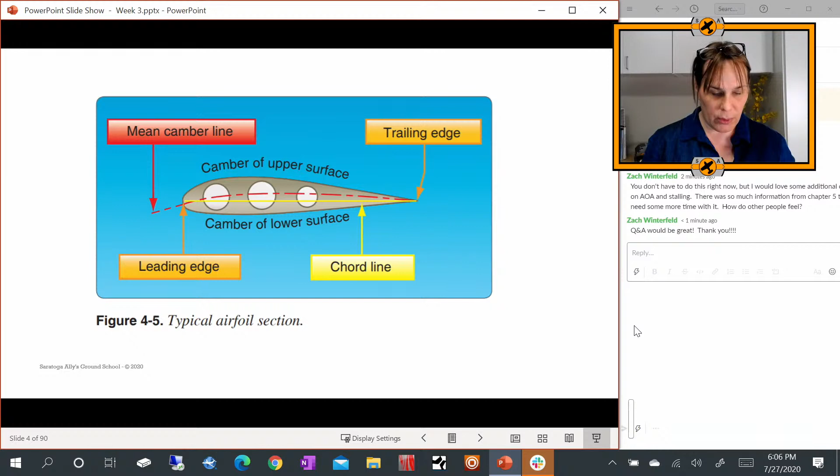The angle of attack - the important thing to know is the chord line. Angle of attack is the relative wind versus the chord line, so it's the angle between the chord line and relative wind, and it applies to all airfoils on the aircraft.

There's an airspeed for each angle of attack to maintain altitude in unaccelerated flight, so you're balancing the force of lift and weight, and depending which way you're going, drag and stuff.

Good question, Brian. I don't know - you're gonna have to tell me, I guess. Never mind, I'll just write a question.

As thrust is reduced and airspeed decreases, the angle of attack must be increased in order to maintain altitude, to balance lift and weight. So if weight is increased, angle of attack must be increased to increase the lift to overcome the weight to maintain altitude in steady unaccelerated flight.

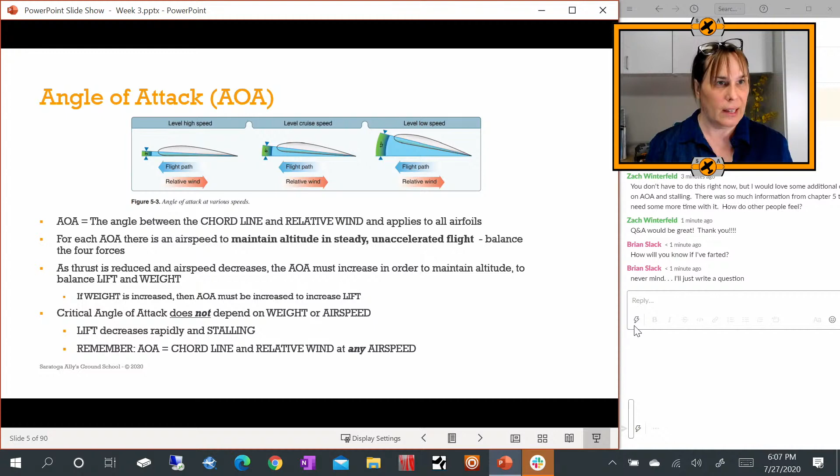The critical angle of attack - this might be on the quiz - does not depend on weight or airspeed. Lift is decreasing rapidly at the critical angle of attack, and then the plane will stall. So the big thing: remember angle of attack, chord line, relative wind, and airspeed. Critical angle of attack is a design speed - it depends on the design of the wing.

Each aircraft has an angle of attack where airflow separates from the upper surface of the wing and the stall occurs. You may call that boundary flow, where the air starts getting turbulent and is no longer creating that nice sucking action on the top of the wing. It's usually between 16 and 20 degrees depending on the aircraft's design - again, the design of the wing, not the weight, not the airspeed, not the density of the air, the design of the wing.

Ground effect - we talked a lot about it, there's a lot of questions. If you looked at study unit 1, did it have the ground effect ones? Or study unit 2 - after this class you'll have enough information. The plane may appear to fly before it's actually achieved the recommended takeoff speed because your induced drag is reduced, so you don't need as much lift and thrust to get off the ground.

You get off the ground, but once you leave ground effect, that induced drag comes in, and you don't actually have enough lift to leave ground effect. So that's why it can be dangerous.

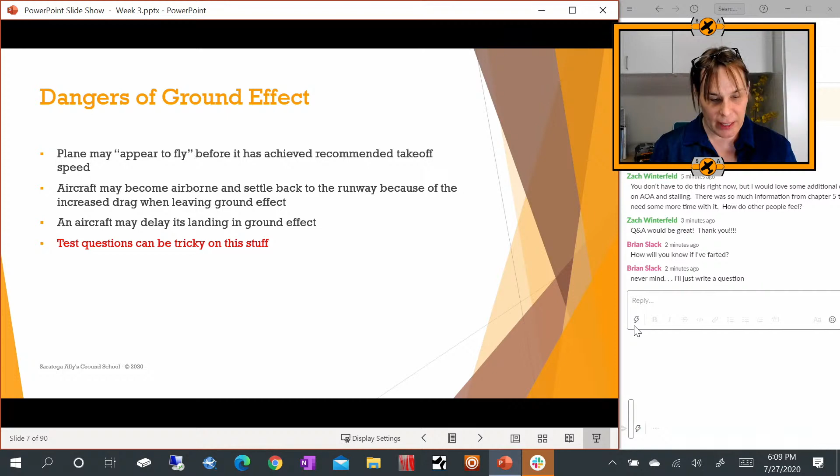In this case, the aircraft might settle back down to the runway, and then what are you going to do - just forget it or try again? A lot of people try again, and they don't make it. The other thing is that a landing can be delayed - as you settle into ground effect, the plane just doesn't want to come down.

We talked about the tail's function in the aircraft, which is really to balance the aircraft against the center of gravity and the center of lift. We also talked about if the CG is in a position where the tail can't overcome that, it's impossible to recover from a stall.

You can get into situations where you get into a flat spin. We talked about that, where the center of gravity is actually pulling you deeper into the spin, and it's harder and harder to get out of it.

So when you're setting your trim, is that affecting your elevator? It does - it affects the elevator. It's mainly to help you as the pilot not to have to keep and maintain that force. So if you're in a climb, you might trim the tail out to balance your loads, so you don't have to hold back on the yoke.

So you'll be pulling on it, and a climb can take 10 minutes depending on the conditions and the rate of climb of the aircraft. You certainly don't want to be sitting there for 10 minutes just holding it back, so you can trim it out. And a side point too - there's a trim configuration for takeoff that they recommend.

There's a little white marking on the trim wheel that indicates where the trim should be during takeoff. That way you're not doing something where you've trimmed it nose high and then all of a sudden you get in ground effect - that would be very bad. Don't want to do that.

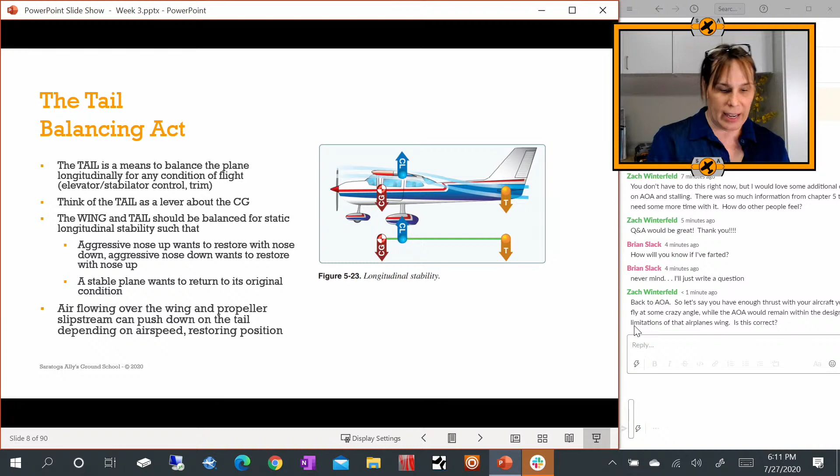They use the downwash over the wing and the tail as a combination to help produce some aspects of stability and basically restore the plane to a stable attitude. So if you aggressively move the nose up, it wants to push down, and if you aggressively push down, it wants to nose up - it wants to fly, right? So part of the function of the tail does that as well.

We talked about forces in a turn. Yawing is pushing on the rudder pedals, moving the rudder, and it will point the plane, but it doesn't create a turn. In order to create a turn, you need to redirect the component of lift to the inside of the turn you want to go, and the way you do that is you bank the wings with the yoke or the stick to either direction you want to go. So that shifts the component of lift to the inside of the turn and pulls you into the turn.

Once you're established in the turn, you need additional lift because you're stealing that lift that was just keeping you in steady altitude. So to have the same amount of lift to keep you at altitude, you're going to have to increase it somehow. So you can add speed or you can increase the angle of attack to increase the lift.

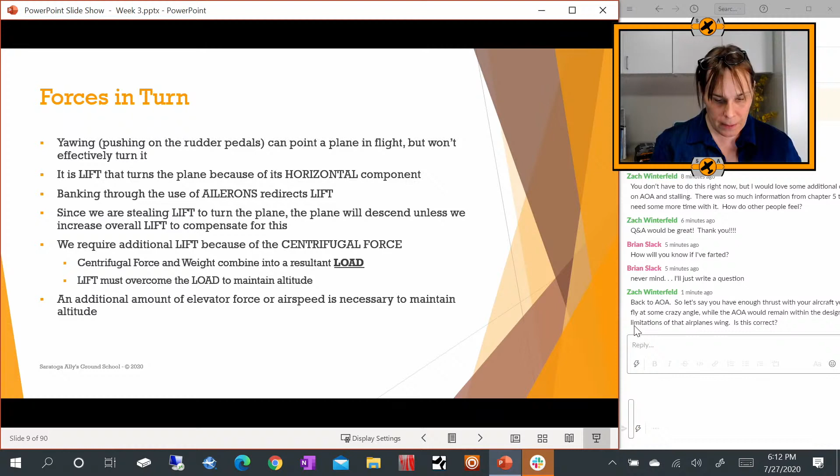We also require additional lift because of the centrifugal force, and this is loads, right? So centrifugal force and weight combined into a resultant load. The lift has to overcome the load. It also needs to make up for the fact that you've taken that lift vector and redirected it to the inside of the turn.

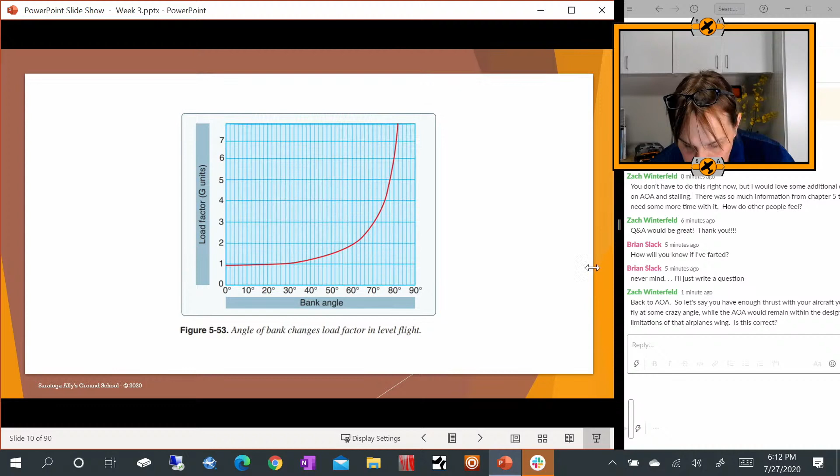You've got a question. I do. Let's see if enough thrust in your... Got it, move it over. Let's see.

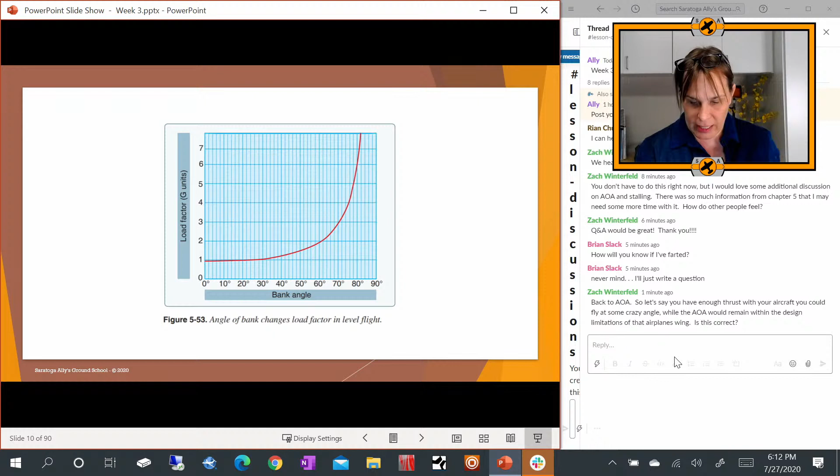With enough thrust in the aircraft, could you fly at some crazy angle? Yeah, so remember the function for lift includes a velocity, right?

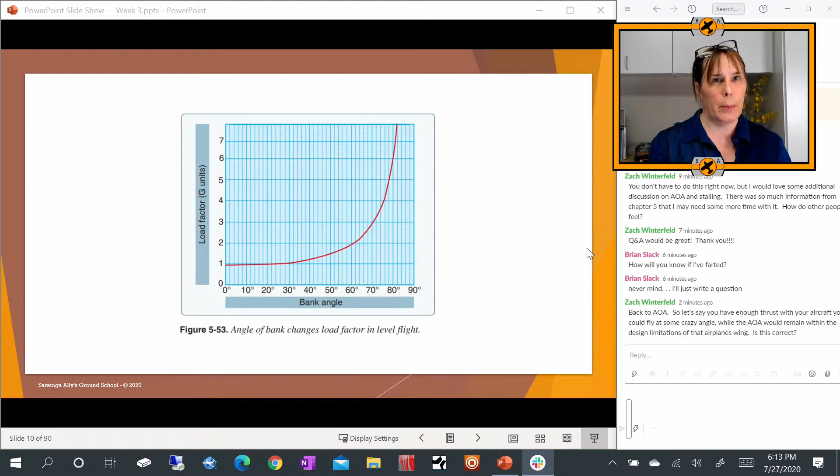As long as you remain within the design limitations of the wing, yeah. So as long as your load factor—if you remember that VG graph—that's really what it comes down to. As long as you're within the green or yellow area with non-turbulent air, then yeah, you can use speed to increase lift. Then your radius of turn increases, and then you remember the big diagram of the guy in the box canyon that was trying to get out of it, and he didn't climb, he just stayed at the same altitude.

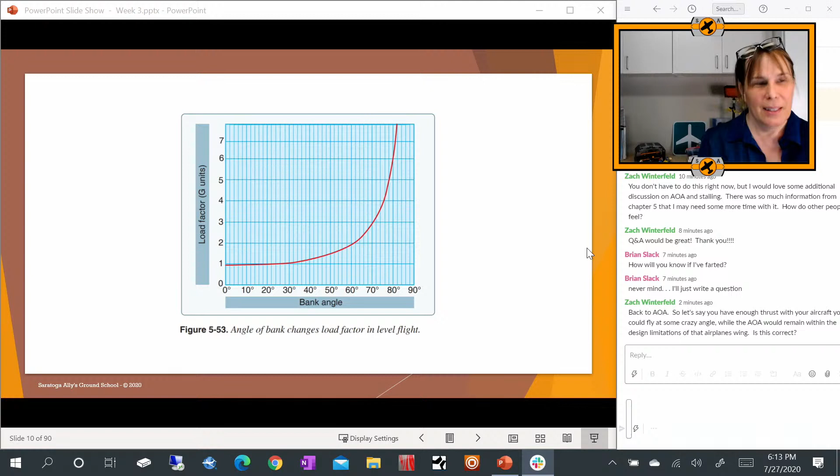We don't know. One diagram appears as though he might have climbed. So one diagram appears as if he did go down. I think it looked like he just slammed into the edge of the canyon, but yeah.

So when we do change the lift vector to the inside to make the turn, what happens is we get more lift on one wing and less lift on the other wing, which causes that wing to raise and the other one to lower. But we also increase the drag and reduce the drag on the other, and that causes this thing called adverse yaw. So basically the nose will want to point in the direction of the raised wing, and to overcome that, we need to apply rudder pressure on the inside of the turn.

Also, an airplane will naturally slip. So if you don't apply rudder pressure, it will slip if you make a turn without using the rudder. They talk about this because there are tons of questions about whether this is a skidding turn or a slipping turn, and which side of the ball and the wings, when we talk about turn coordinators, is a slip and which one's a skid. But if you just remember: if I bank the plane and I don't do anything with the rudder, I'm slipping. If I aggressively push on the rudder in that turn, I'm skidding.

Question—will we go more in depth on that later? Well, the flying handbook talks a lot about it, but we'll talk a little bit about this. It's really a practical flying thing, so here it's kind of like, just know that these are the conditions that happen.

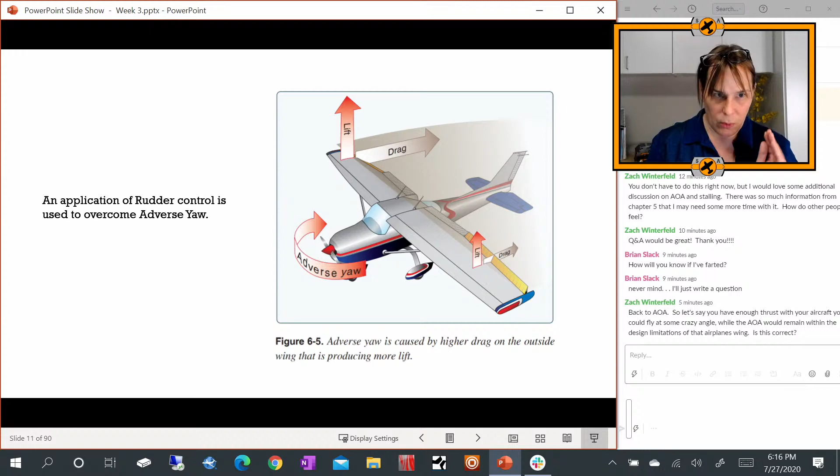Banking the plane and not applying rudder pressure on the inside of the turn will cause a slip. So you would see an inclinometer showing a plane banked left with the ball on the inside of the turn, because it wants you to push on the rudder pedal there to bring the turn around.

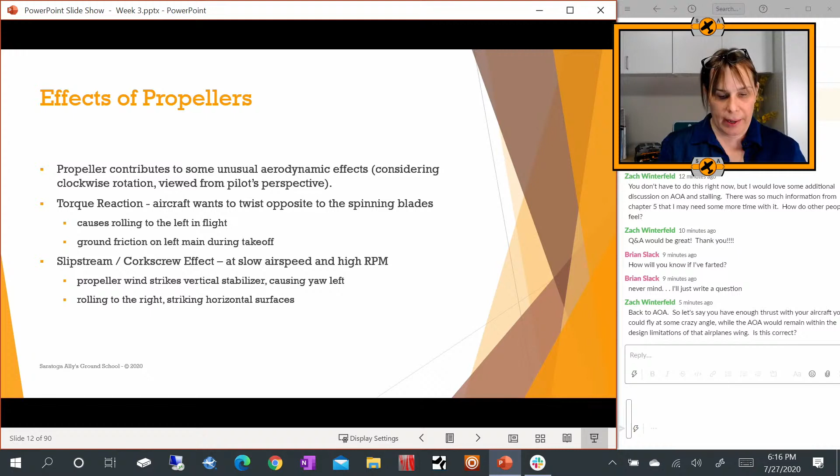We also talked about effects of propellers: torque reaction, slipstream, the corkscrew effect, where the air going over the aircraft is actually hitting surfaces and causing it to turn because of that. The gyroscopic action, where I took the gyroscope, spun it, and then tipped it up, and it went off to the side. Asymmetric loading — there's questions on the written about that. The propeller takes a bigger bite of air on the downstroke. All four of these, I think, are covered in the written test, so expect to see them.

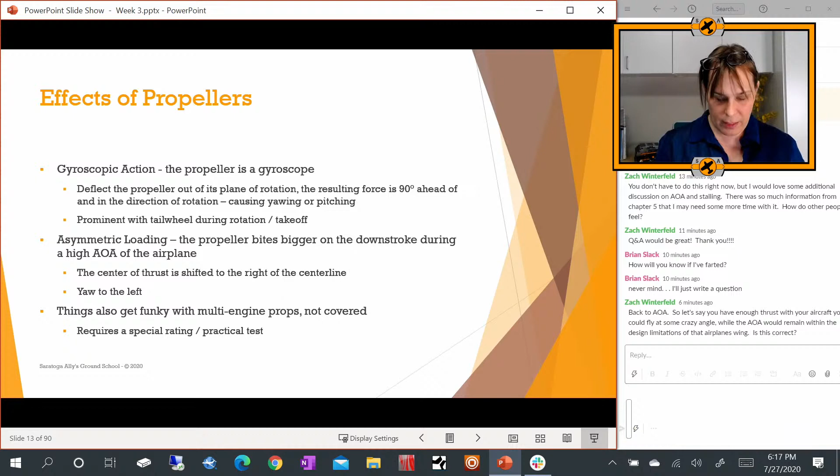I also mentioned that multi-engine planes are funky because of that center of thrust line in them. We all need to know weight and balance — we'll actually be going on an entire chapter section on that later.

Okay, so now the new topic — 17 minutes in and the new topic. This chapter was all about aircraft systems: the engines, the induction system, the electrical system, just everything in the aircraft that doesn't necessarily have to do with navigation or flying the plane, but has to do with the operation of the aircraft and the fuel.

When we talk about these planes, we're talking about a 4-cycle combustion engine. I know the book went into 2-stroke engines, but that's not the case with the typical planes we'll fly, so I'm only going to be focusing on the type of stuff we fly. That's why I said don't bother reading the turbine, turboprop, or turbocharger stuff.

This engine design is practically unchanged for 60 years, if you can believe that. They started out with radials, then they tried V engines, and what they found out is that this horizontally opposed engine worked most efficiently for cooling the engine. So that's kind of the way it's been in most planes — you'll still see radial engines and sometimes V engines, but for the most part horizontally opposed, and it's usually 4 or 6 cylinders.

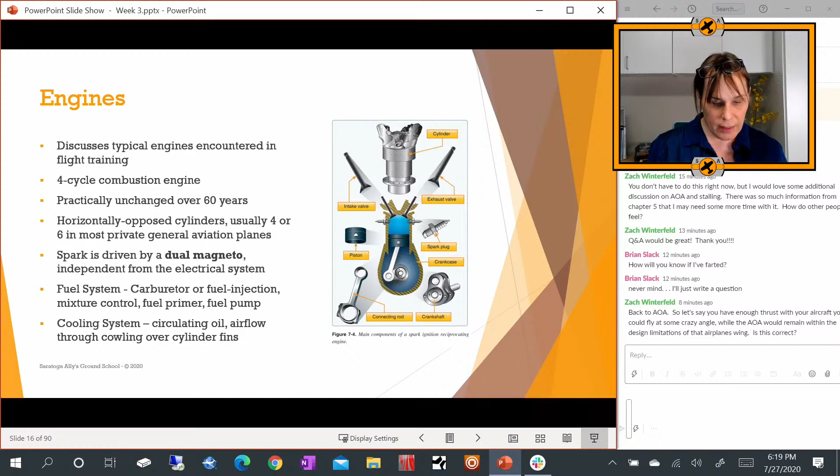The cooling system, typical stuff, right? Air circulating over the engine — huge in airplanes, probably not as much in cars. Oil is important in both cars and airplanes, but cooling is a huge aspect of keeping the engine running well when you're flying.

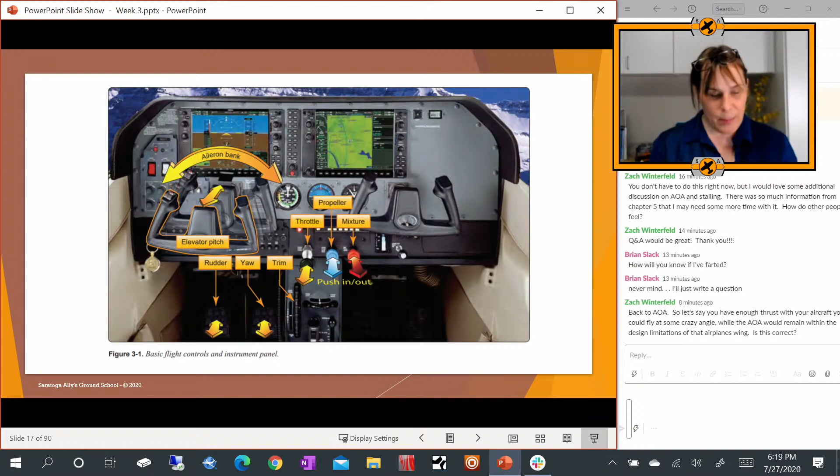And the airplane, it's mechanically connected too, but not usually with a belt, but usually actually a geared connection, so it's a little more robust.

The throttle is what's going to control that amount of fuel-air mixture going into the combustion chamber. Specifically, that's how they word it. You'll see it on the test like that.

So the amount of fuel-air mixture, you have control over the fuel-to-air ratio. The throttle, the black control, is the amount of that mixture that's going into the combustion chamber.

So an open throttle is you push the control up or you raise the lever. It's going to open the throttle and put more fuel-air into the engine.

And closing the throttle, pulling back, it's going to be less fuel-air mixture going into the engine. When you cut the engines, when you stop the plane, you'll pull it full close and you'll lean the mixture all the way out.

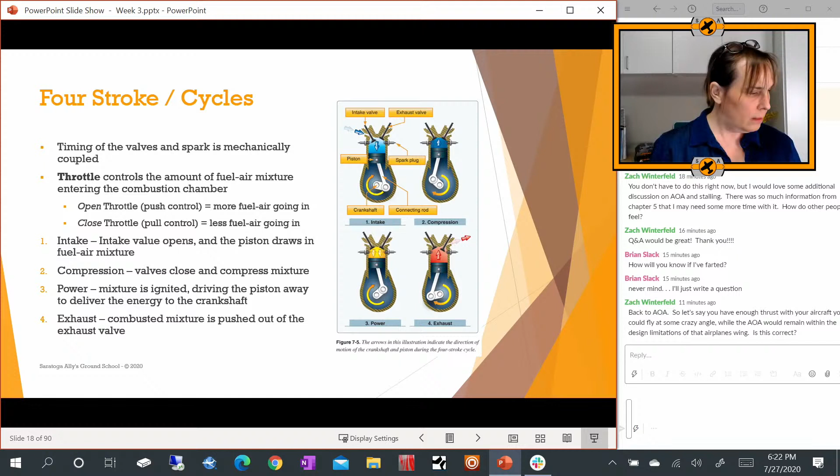Now, can we get back to that one? Sure. Water. Okay, groovy.

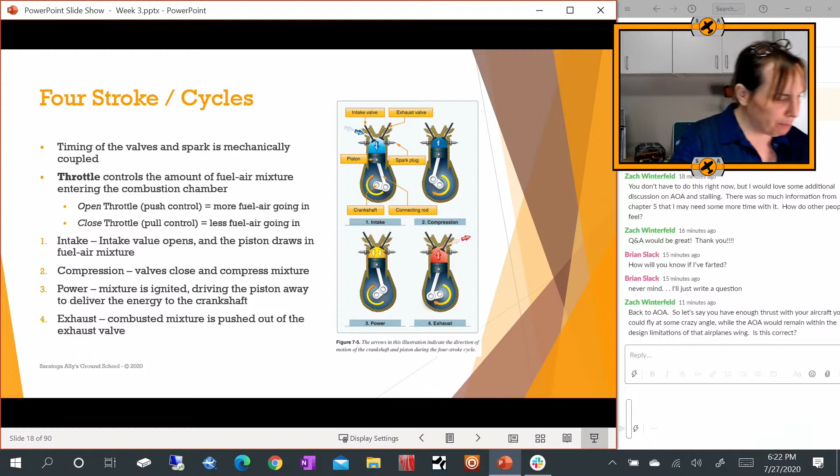The prop control, the little blue control, you'll see it if you have a constant speed propeller. You will not see it if you have a fixed pitch propeller.

So you won't see a manifold pressure gauge in a fixed pitch propeller instrument bay. You'll just see a tachometer, and that's a direct reflection of the power, or the amount of energy being delivered by the engine. So that's controlled by the throttle alone.

So you'll see that in the Cessna 172, the Diamond 20, the DA-20, and like the Archer or the Cherokee Warrior, the Piper line of aircraft.

Constant speed propeller, on the other hand, the throttle adjustment is adjusting the manifold pressure. It's reflected in the manifold pressure gauge, in inches of mercury. If the engine is shut down and you're sitting on the ramp, it will actually indicate static air pressure, whatever the barometric pressure is — you'll see that on the gauge.

What you do with the RPMs is you can use the propeller control to set the RPM. And what this allows you to do is come up with combinations of engine horsepower, or engine power, and propeller speed.

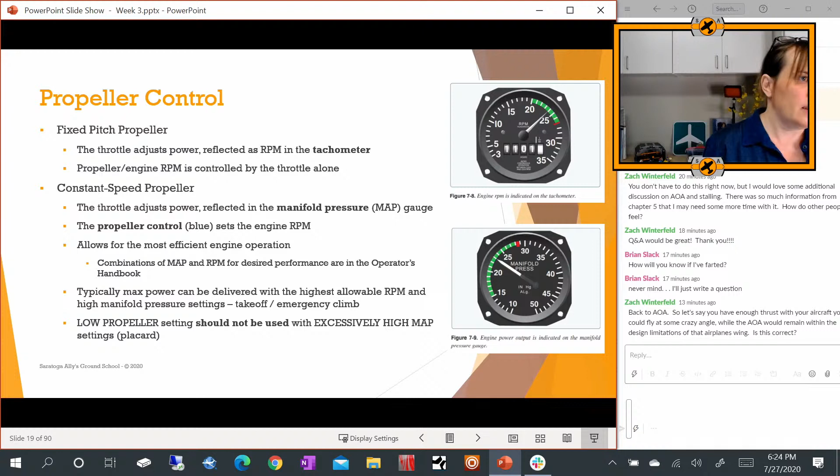The best way to think about it is like a gearing system in a car. You're going to go up a steep hill, you put it in low gear, you'll get the maximum power out of the vehicle.

So for example, when you're taking off, you'll put the RPM, the propeller control, full forward, because you want it to have the least amount of bite of air, and you want it to spin the fastest for all that power that you're sending to it.

So in takeoff, the blue one will be forward and the throttle will be full forward, and you scoot down the runway. Where adjustments come in handy is when you're in cruise and now you're just zooming along and you want to make the engine perform more efficiently, use less fuel.

There's combinations published in the handbook that say, okay, run the manifold pressure at 20 inches and then run the propeller at 18, for example. And then lean it out with the mixture, and you'll end up burning 14 gallons an hour.

But if you were just having it full bore the whole time, you'd burn like 28 gallons an hour or something like that. So you have a lot more control over how much power is being delivered and how much stress there is on the engine by manipulating it.

Typically, max power, like I said, can be delivered with the highest allowable RPM and high manifold pressure settings. One important thing, and I'm not sure if this appears on the written, but you never want to have the prop low, like taking big bites of air with a lot of power coming out of the engine, because that's just too much stress on the crankshaft.

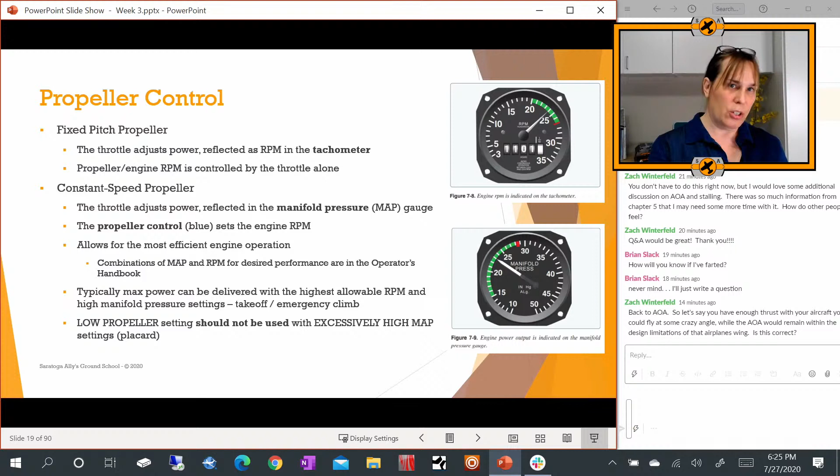So it's like putting it in fourth gear and trying to start from a stop, I guess, is the best way to make an analogy there.

Let's mention the mixture control briefly. The throttle controls the amount of fuel-air mixture delivered to the engine. The fuel-air ratio is the weight of each, fuel and air. It's not the volume, it's the weight entering the cylinder. That's important, and there are questions on the test that will try to trick you on that.

Air density affects power output. As the air thins or thickens, the weight of fuel in the mixture remains unchanged. So if it's weight of fuel and weight of air, and the density of air is changing, that means there's going to be more fuel present as the air thins, or less fuel present in that ratio as the air thickens. This is causing the mixture ratio to change.

During a climb, the mixture becomes richer. There's relatively more fuel in that mixture because the density of air has decreased. Then during a descent, the fuel-air mixture becomes leaner, so there's relatively less fuel in that mixture.

If you've leaned the airplane for high altitude flying or flying from a high airport and you don't enrich it coming out, the engine could quit on you as you're coming into your lower altitude airport. They usually talk about it the other way around, but nobody really thinks about it going in. If you never pay attention, the other thing that can happen is your engine can overheat running too lean. Typically though, either way, you'll see a loss in RPM in a fixed pitch propeller, or a loss in manifold pressure in a constant speed propeller.

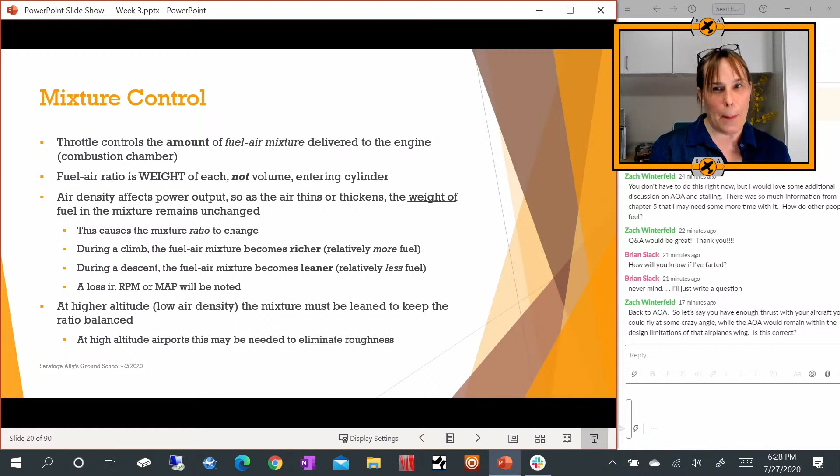At high altitude, with lower density, the mixture must be leaned to keep the ratio balanced. At high altitude airports, this may be needed to eliminate roughness. If you don't adjust it and you've got everything full rich while taxiing around, the engine can get flooded, or the spark plugs can get fouled. There's fuel that's actually not burning and it's collecting on the spark plugs, and that creates a carbon deposit.

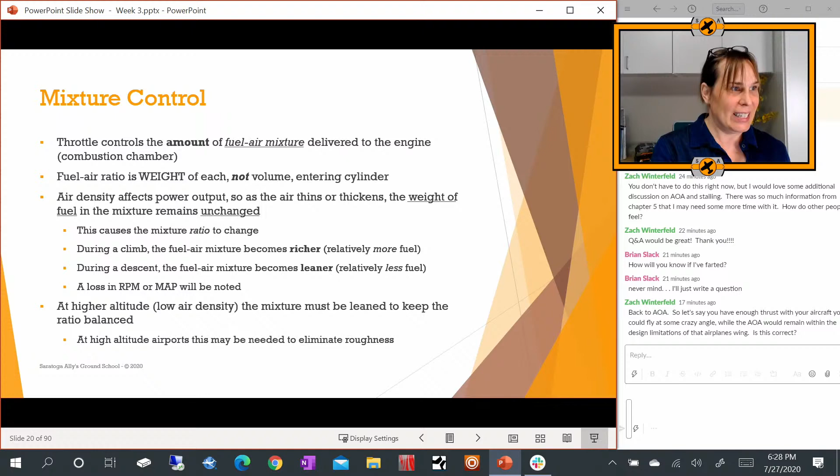What can actually happen is fuel can detonate on that deposit because it's hot, before it actually gets sparked. They talk about that as one of the behaviors, detonation and pre-ignition, in the written test.

The mixture control is that red dial or lever, and it lets you change this ratio. You push it to make it richer, you pull it to make it leaner. When you shut the plane down, you pull the throttle and the mixture all the way back, and it'll cut the engine. Leaning the mixture will decrease the fuel flow, which compensates for the decreased air density at high altitude.

The higher you fly, the less fuel you can burn, but it's going to take a lot of fuel to get up higher. So it's like one of these games. If you're taking a short flight, it probably doesn't make sense to climb high, but if you're flying for 2-3 hours, it might make sense to go up a little bit higher. You can bring the fuel back and burn less fuel overall. These are things you think about when you're flight planning too.

Especially if you own a plane. If you're paying a fixed price and you don't care because they're covering your fuel costs, you probably won't pay attention.

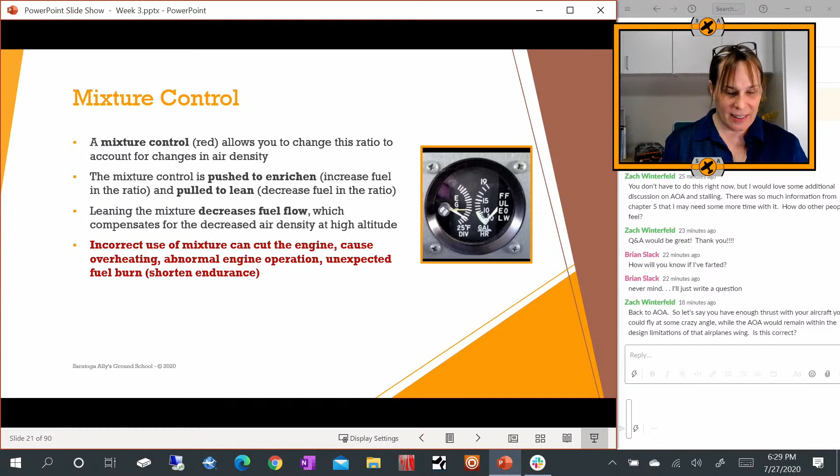But incorrect use of the mixture can cut the engine, obviously. It can cause overheating, abnormal engine operation, and it can cause unexpected fuel burn or shorten the endurance of your flight. You plan for the flight, you never lean it back, you think you've got 30 minutes more of fuel when you get to your destination, but oh, I never leaned the plane during the flight, and now I've actually burned through all the reserve that I thought I had.

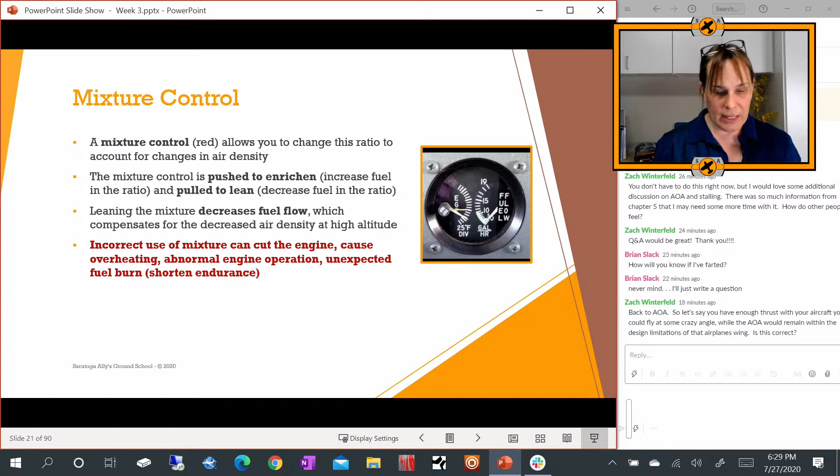So it's an important function, and it's important to understand why, and what effects it has.

The induction system, so this is the carburetor, the fuel injector, is responsible for mixing the fuel with the outside air. An air filter is there to prevent debris from entering this mixture, and if the air filter gets blocked by ice or bird nests or whatever, you're not getting anything to go in there. So you'll know in flight if your air filter or air intake's been blocked by ice or snow, because you'll see a reduction in power.

There is an alternate air switch in most planes, and some of them are automatic. On the Cessna, there's an automatic one. If the air intake gets clogged up, the automatic one will just take over. In our plane, we actually have a lever you pull down to open alternate air, and it comes from inside the cabin, so it's a little warmer than outside air, meaning the density is a little less, so you have to take that into consideration. You'll see, if you just operate the alternate air, like during a run up, you'll see a reduction in power from using it versus outside air.

As I mentioned, there's two types. There's a carburetor - the most common is this float type carburetor. This operates on the principle of a pressure differential and a venturi throat in the carburetor, and that airflow through there is actually controlling how much fuel gets pulled in and mixed in. It's really an interesting thing. I'm not going to get too deep into it because we have so much to cover.

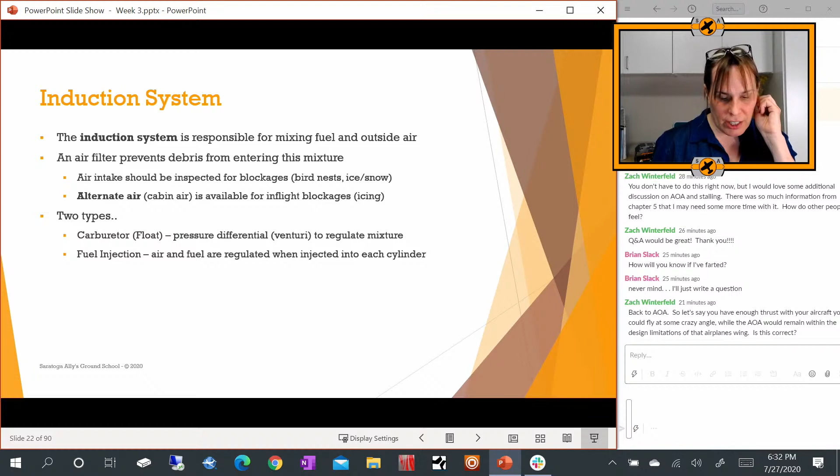So mainly older planes and smaller planes will have a carburetor type system. It's not as expensive as a fuel injection system. With fuel injection, air and fuel are regulated as they're injected into each cylinder, well, nearly there.

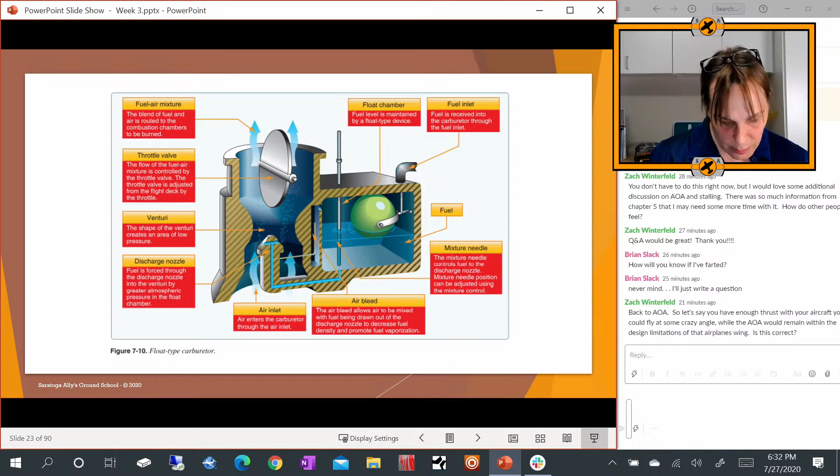Here's that picture from the diagram. You see this little venturi throat thingy here - I don't know if I have a pointer. Do I have a pointer? Okay, so this right here, this little teepee or pyramid thing, is bringing the fuel in. Then the throttle valve here is controlling and regulating how much airflow is coming through. And the venturi throat is actually, that lower pressure is what's drawing the fuel in. So by controlling that, you're controlling the ratio. It's pretty fascinating, but beyond what we can cover here today.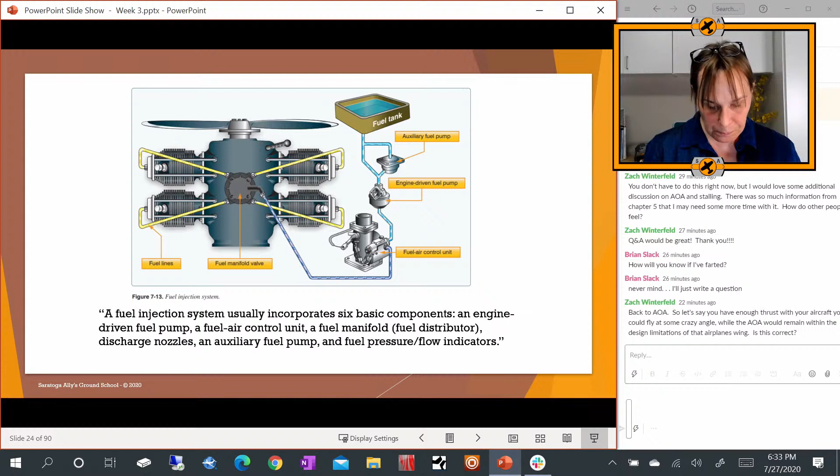The fuel injection system, more common nowadays than it used to be, incorporates six components. There's an engine-driven fuel pump, the fuel-air control unit, a manifold which is the distributor - the fuel distributor - these nozzles that are actually discharging fuel into each of the cylinders, then an auxiliary pump in a lot of planes in case the engine-driven one fails for whatever reason. You have a backup electric-powered auxiliary pump, and then, of course, the indicators showing you what's going in and out.

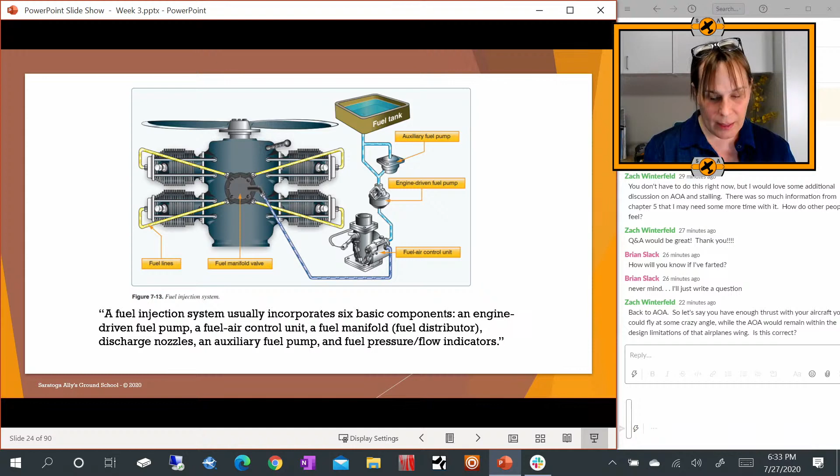So you could argue that this looks more or less complicated than that. Obviously, there's more parts here. This is definitely a more expensive system to maintain, but more reliable. And it's not as subject to icing, which we'll talk about next.

So carburetor icing is because of that venturi, that narrowed throat. As you reduce the pressure there, you've actually raised the freezing point in that throat. So you can actually get icing even between 20 and 70 Fahrenheit - and I meant to put Celsius in here for our international friends, but I don't have it, sorry. Marcy might know, she memorizes that conversion. Anyhow, you just need humidity, so even at 70 degrees you can get carburetor ice.

So typically, when you're doing pattern work in an aircraft, you'll pull the carb heat, no matter what the conditions are - it's just a habit. You'll do it once you reduce that engine power. So a drop in RPM on a fixed pitch prop will be seen if carburetor ice has formed. That's how you know you're not getting a good mixture anymore, because that ice is in there preventing the mixture from being correct.

So planes here have a carburetor heat - it's just like a little thing you pull out right there, a pull-push type thing. Like I said, older 172s, 150s, 152s will have carb heat. The Citabria I was flying for tail wheel training has carb heat.

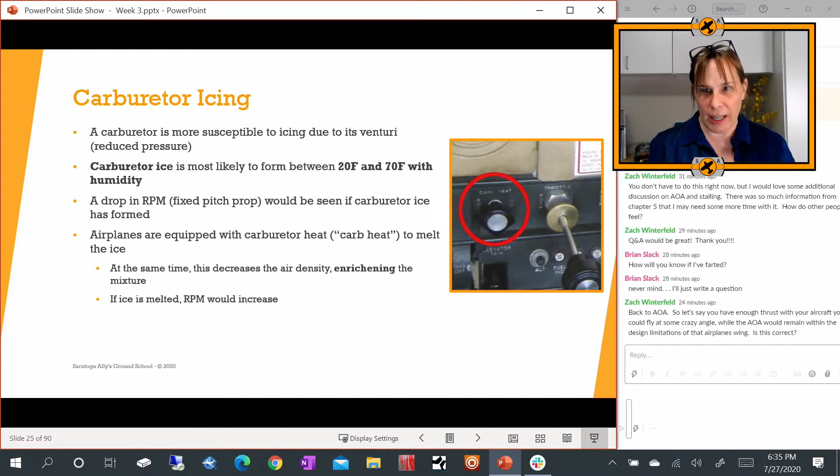That effectively melts the ice, and then you'll see the RPM increase if there was icing present. When you apply carb heat, you're decreasing the air density because you're raising its temperature. So if you don't have ice, you'll pull carb heat and you'll see a reduction in RPM. You will see it actually get better after a while if there was ice present. So here's that ice, disrupting the volume of stuff going through the carburetor.

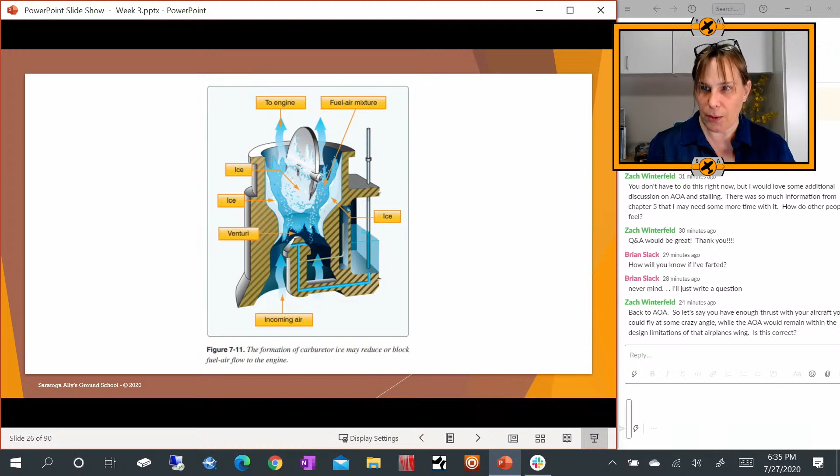I like that, volume of stuff.

So the ignition system is the thing that drives the explosion in the engine. The spark plug ignites the fuel-air mixture inside the compression chamber. In aircraft, they have a dual ignition system, with a left and right side, meaning there are 2 spark plugs per cylinder and 2 sets of magnetos driving those spark plugs. It's a redundancy - if you lose half of your spark plugs, you still have the other half, hopefully not both in the same cylinder, plus the dual magnetos driving that.

You also get a more efficient burn having 2 igniting points inside the cylinder, so you're not wasting as much fuel.

The magneto system depends on the engine driving them, not the electrical system. This is how you can start an aircraft without actually having battery ignition - you can just hand prop it.

Thinking back to all those old movies where you just swing the prop and run away quickly - a lot of those guys only did this because they'd already lost an arm. You could tell who was experienced that way.

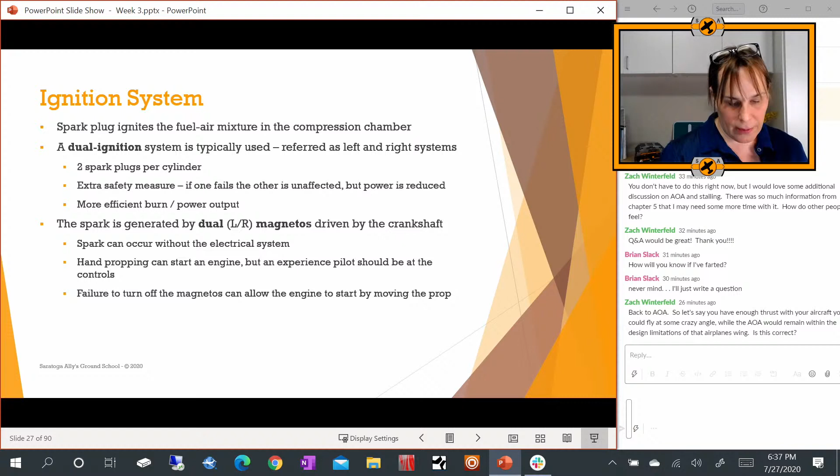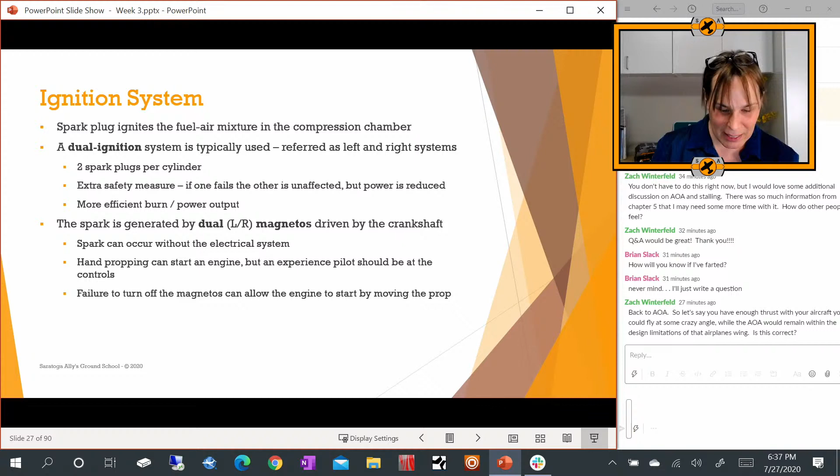Failure to turn off the magnetos, if they allow the engine to start without the starter, can let the engine start just by moving the prop. It's a no-brainer, but it's in here because it's on the test and separately identified that way. Another thing they mention is a ground wire on the magneto - it's almost like not being able to turn the magneto off. If there's a bad ground wire, like it's rusted out or disconnected, it could still start. That's one thing they've mentioned in the test before.

You wouldn't use the starter. From the ignition system, you would probably set it to both - I've never hand started it, and I hope you never have to - but the magnetos would need to be on.

I'll give you a perfect example. One day I was going flying and forgot to turn the magnetos on in my Saratoga, and it was cranking and cranking and cranking, and it never started.

In our plane, the magnetos are on actual separate switches. They're not part of this nifty little thing the Cessna has, where you actually have to swing through the magnetos to hit the starter. So I have switches that are completely separate.

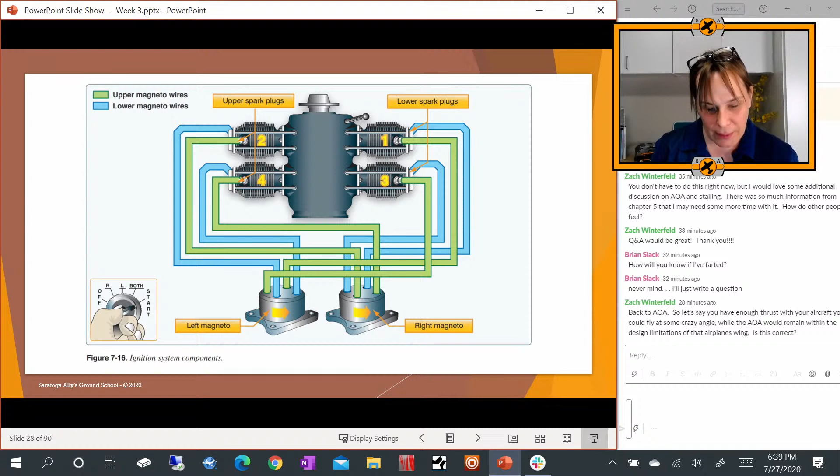Why isn't it starting? I didn't prime it. Yeah, whatever - nope, magnetos aren't on. Good job, yay me. So you can't start the plane when the magnetos are off. Yep, I found that out.

They have to be on when the magnetos start. You have to have that - like I said, in the Cessna you actually go through turning the magnetos on before you get to the ignition or starter. But in some planes, there are switches, so you actually have to turn those switches on.

It's kind of like turning the key in a car, where you have to pass through certain stages. Well, there's an accessory stage in that, but in this specific case, it's magnetos. I don't know if cars have magnetos - maybe somebody knows. Race cars have them. Do they? Okay, race cars have magnetos.

A magneto is like on your lawnmower. Lawnmowers have magnetos and run off them - they don't have batteries. That's why you crank and pull, and as soon as the magnets pass a point, it starts.

Now on an airplane, instead of being hardwired always on like your lawnmower, an airplane has an off switch, and it's just a safety feature. There's no real 'on' for a magneto, but there's an off. So when we say we're turning an airplane on, we're really taking it off of off - ungrounding the magneto, disconnecting it. You connect the magneto by completing a circuit.

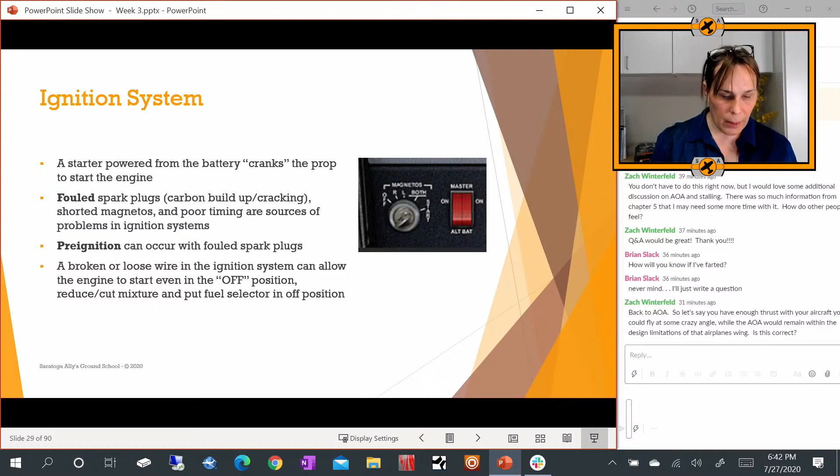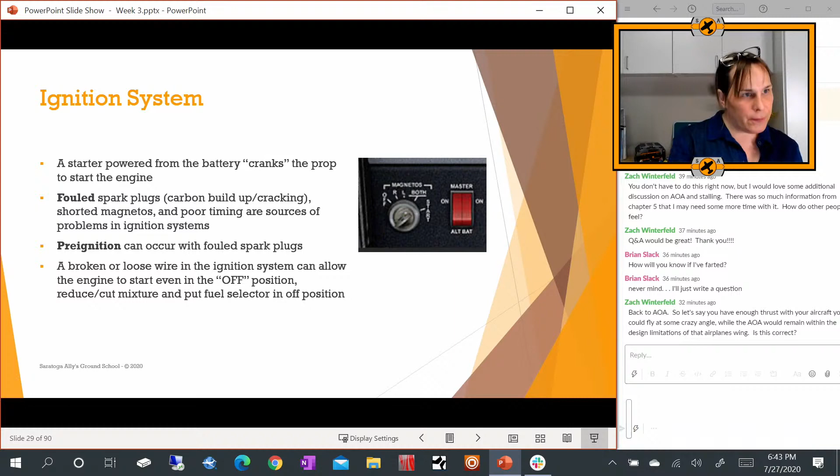So it's pre-ignition, not detonation, that can occur with fouled spark plugs. There's a hot carbon deposit, the fuel-air mixture comes in, and it pre-ignites before it was meant to with the spark. A broken or loose wire in the ignition system can also allow the engine to start even if it's in the off position - we talked about that at length. In this case, you can reduce or cut the mixture and put the fuel selector in the off position, basically not allowing any fuel into the engine if it starts unexpectedly and you need to shut it down.

The oil system is one of the things that helps cool the engine in addition to airflow over the engine - it's probably the most important function. It keeps things running smoothly, lubricates the engine, and reduces friction on the cylinders. It also provides a super tight, efficient seal between the cylinder walls and the piston, and additionally draws heat from the engine. So you can see the problems you'd have with low oil pressure.

The filter prevents contaminants from getting recirculated back into the engine. Where would these contaminants come from? On a brand new engine, they score the inside of the cylinders and let the piston work it in, so you run mineral oil, a higher viscosity oil, for a period of time while breaking the engine in. That rough surface is very fine, but bits of metal get scraped off the piston, and the filter catches some of that. The rings on the pistons and the cylinder metals involve some dissimilar metals, so they'll have your oil change actually analyzed by a lab, looking at it under a microscope.

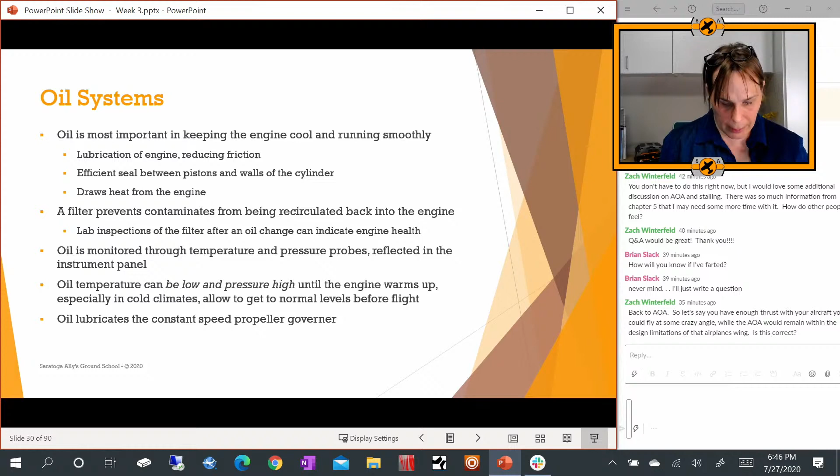Right, governor. All right.

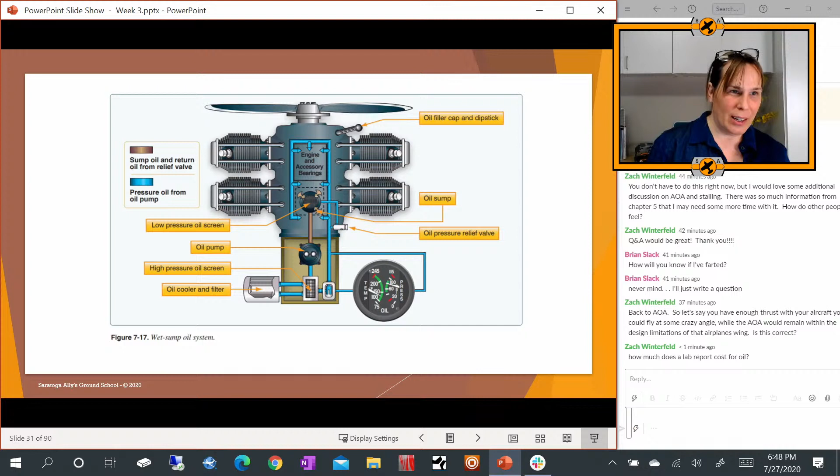So you check the dipstick when it's warm too, just like a car, or can it be accurate when cooled for it to be accurate? That's a good question. I usually just check at the beginning of the day, but it is harder to check when it's hot - harder to see the oil level when it's hot. Does it change volume a lot with heat? It seems pretty consistent even over the operating range, it doesn't change volume much. If your engine's running well... it doesn't really expand or contract a lot, it gets more viscous or harder to move. If the engine's running really well, you'll have oil that's really hard to see - everyone thinks oil is black, but that's usually about when you're going to change it, right? Yeah, but at a clean oil change, it's going to be hard to read that dipstick.

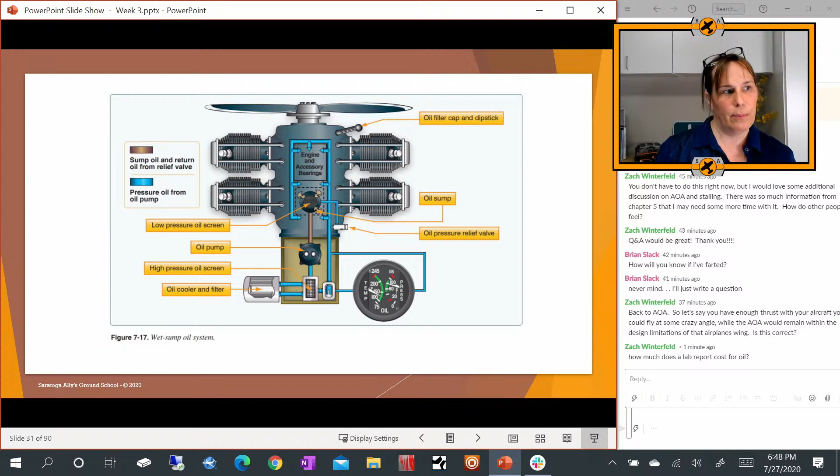Oh, the lab report kits, they're not bad. You buy kits, and they just send you like a little jar, like a urine sample jar, that you put the oil in, and it has a serial number on it, and then you send it back. You can order kits on Amazon even, or Sporty's Pilot Shop, and I think the kits are like $25 or $30 - they're not bad. So when I go do my oil changes, the guys there do it as part of the oil change. They'll send it out to the lab, and then like a week or so later, I'll get the report back.

So the different kinds of fuel systems, there's basically two - a gravity feed, and then a fuel pump driven fuel system. Gravity feed, pretty obvious, high wings, right, above the engine, just gravity feeds it in. Usually those systems will feed both wings evenly, but you can select if you want to feed only from one or the other wing. And then a fuel pump system has an engine driven pump, which is good, right? Because if the electrical system goes, you want to still pump fuel. But there is an auxiliary electric pump too.

Kevin, did you have a question? I do - why would you want to select just drawing fuel from one wing? Because wouldn't that make that wing lighter? Yeah, why would you want to draw fuel from only one wing?

Let's say for whatever reason one side isn't clearing out as fast as the other and you get off weight, you would intentionally switch to the other tank if you're expecting both. Another reason you might only choose one tank is that, say, you found contamination in that fuel tank, like water contamination. But routinely, you wouldn't just draw fuel from one side tank. You would leave it in both. The only reason to leave it in left or right is if you saw a specific imbalance that you wanted to correct in flight.

Those tanks are usually at the root of the wing, or they're not outboard too far, are they? Auxiliary tanks can be at the tips - they have tip tanks - but generally speaking, because of the dihedral of the wing, the fuel rests near the root. Filler caps are generally a third of the way down the wing. I think ours are closer to half, right? Yeah, but most of the time you'll see them about a third of the way down the wing.

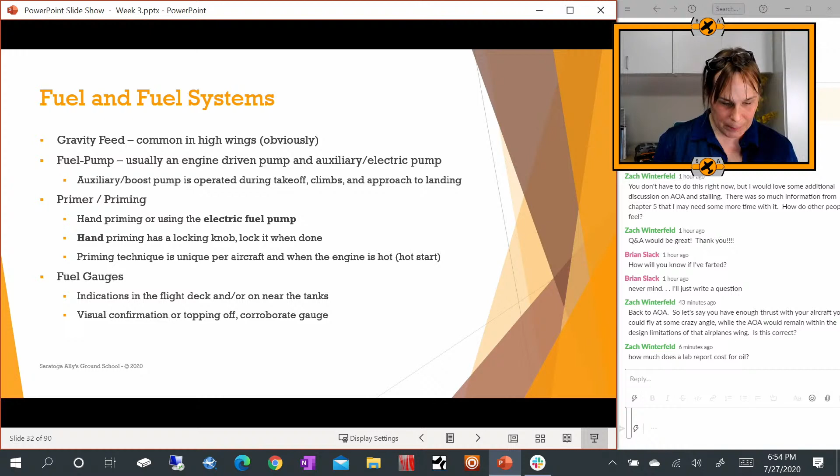Obviously, topping off the tank, you'll know they're full. This fuel selector is important - the only reason to put it on off is if you have some sort of emergency situation you're dealing with, like a fire maybe in the engine, and you want to cut off all the fuel going in there so the fire doesn't get worse and come back into the tanks.

Storing the plane, maybe you'll turn it off, or when they're doing maintenance, they might turn it off. Do you turn it off when yours is in the hangar? No, I just worry I'd forget to turn it back on.

Kevin asked if I turned it off in the hangar. I do not. Well, leaving a motorcycle, we would turn it off. My gas is on the floor. Oh, that's not good. Or trying to start the motorcycle when the fuel's off. Turn the fuel on, I've done that so many times.

If you can't start the plane, start here and then go up the fuel system chain. Start first and see if you actually have fuel in the tanks, then go here.

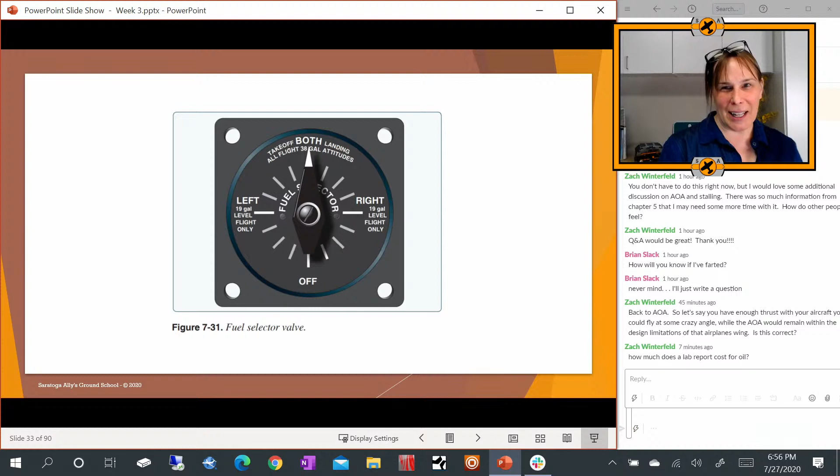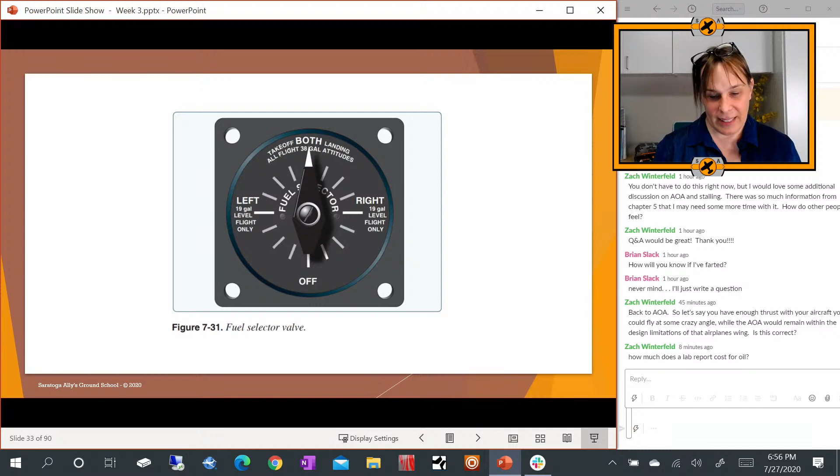What effects would you feel on the plane if it was off weighted because of fuel distribution, right? You'd probably be pushing on one of the rudder pedals more. You might be banking the plane weird. You're definitely not going to have straight and level coordinated controls.

Turning the fuel on, well, it is a pre-flight item. There's a setting to both, is what it says in the Cessna usually. So just confirm it's set to both. If you're going through checklists, you shouldn't miss it. But you have passengers in the plane, you never know what can happen, so even after you pre-flight, I can think about that.

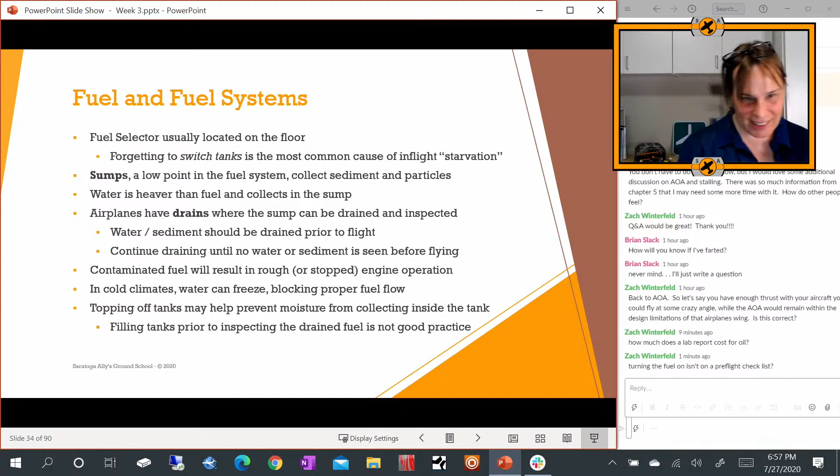Touchy, right? What's this do? Hey, everyone's Pee Wee Herman, right, the passengers. Anyhow, so that fuel selector... What's that? It's not me, I was like this the whole time. Nothing, well, I was thinking of that kid in, was it Home Alone? The neighbor kid that came over and got counted instead of Macaulay Culkin, but he was like poking through the kid's stuff in his room and everything, saying 'what's this do?' Anyhow, sorry, that's just the imagery that comes to mind.

So the fuel selector is located on the floor typically. In the Cessna, it's like right there. Same thing in the Saratoga, it's right on the floor in front of the trim.

Now a sump anywhere is just a low point, right? So the sump is the low point in the fuel system, and there are drains where we can collect samples of the fuel to see if there's water present or sediment. Sometimes the drain itself can get cruddy and that's what you're reading, so just flushing the drain sometimes clears out particles. Since water is heavier than fuel, it'll collect in the sump.

When you take a fuel sample from that drain to check for water, you'll see the water sitting at the bottom of the sample cup and the blue fuel floating on top of it. You should continue to drain until you no longer see water.

It could be a condition where one wing for some reason has water in it. You need to go somewhere, so just run off the other tank on the other wing, put the fuel selector on that wing, knowing you only have what's in that wing to fly. But that could be a case where you know something's up with sediment or particles in one of the tanks.

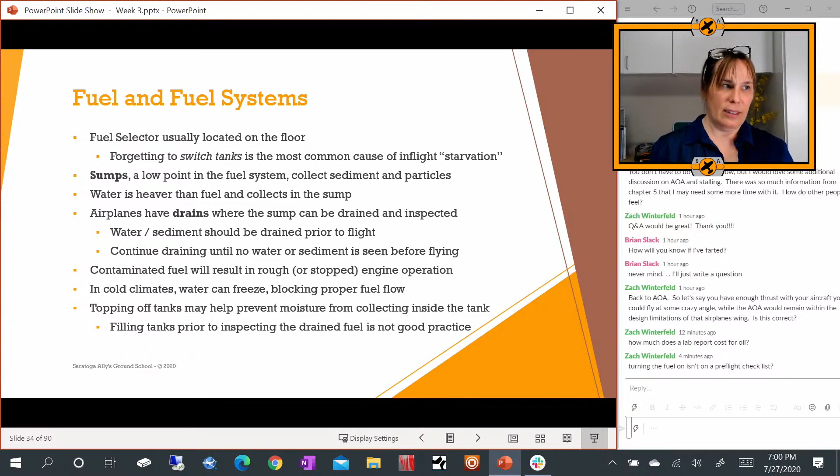Here's a thing you might not think about: filling tanks prior to inspecting the drain fuel is not a good practice. Can you imagine why? You'd be mixing the water out—if it's already contaminated, you're just mixing it up, and you may not even see the contamination. So if the plane's been sitting, that's a chance for everything to settle down, and that's the best time to take those drain samples. So if somebody's going to come fuel your plane, try to get those samples before they disturb the fuel tanks.

General aviation planes use 100 low lead. It's blue-colored avgas. There are other grades, but I haven't seen them recently anywhere—maybe out in the bush somewhere they'll have 90 or 80 or something. They're color-coded, but for us, most of the time, we're going to see this blue stuff.

Rian asked, how long does avgas last? Well, if you have a 50-gallon tank and you burn 10 gallons an hour, that's 5 hours.

That's not what you were asking. I'm not sure—I mean, how long can it sit in the plane without using it? Yeah, that's a good question. Yeah, I know, why aren't you flying your plane? I mean, I don't know winterization practices because we don't have to do that here, but I know there are some things people do with winterization.

Yeah, well, I know with cars you can recycle your used oil. You can recycle the used oil, yeah. But I don't know if they even do that with avgas. They might do that, but they won't throw it back in a plane unless it gets processed. So yeah.

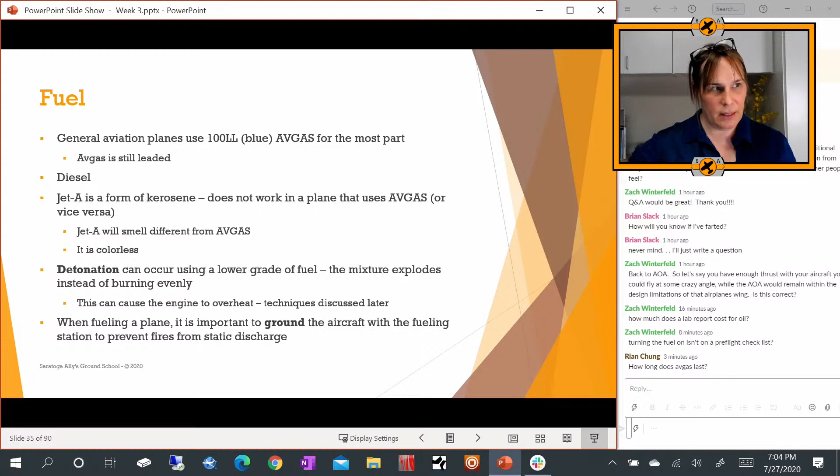When fueling a plane, it's important to ground the aircraft with metal things, not plastic things. I heard tale of somebody who emptied a wing into a plastic bucket and burned the entire plane down. So, use metal things connected to the fuel source and connected to your plane—they're both grounded to the same thing, the nozzle grounded together. Hold the nozzle against some metal part of the filler cap while you're filling it. Don't explode your plane.

The electrical system, typically a 14 or 28 volt DC system, will power the communication radios, avionics, the lights, and all those pumps we talked about, the auxiliary and boost pumps that are not engine driven.

The battery is recharged from an alternator, pretty similar to a car. That's attached to the engine shaft. On some planes you can actually see the little belt right in the front of the plane as you're inspecting the aircraft, attached to the shaft going to the alternator. A typical pre-flight check is to make sure that's snug and on there.

The alternator supplies slightly higher voltage in order to charge the battery. So if it fails, your battery will eventually drain. Or if it's unable to charge above it, even if it's just charging a little bit under, your battery can drain, it just takes longer.

An alternator overcharge could occur, and if that happens, you might want to turn it off because it's driving way too much voltage into your battery. It could blow up your battery and cause a fire in your airplane, and then you have to make an emergency landing usually. The best thing to do is, there's usually a separate switch for the alternator, you can just pop it off in that case. Again, don't explode your airplane. But this is one technique you can use and apply practically to not exploding your airplane.

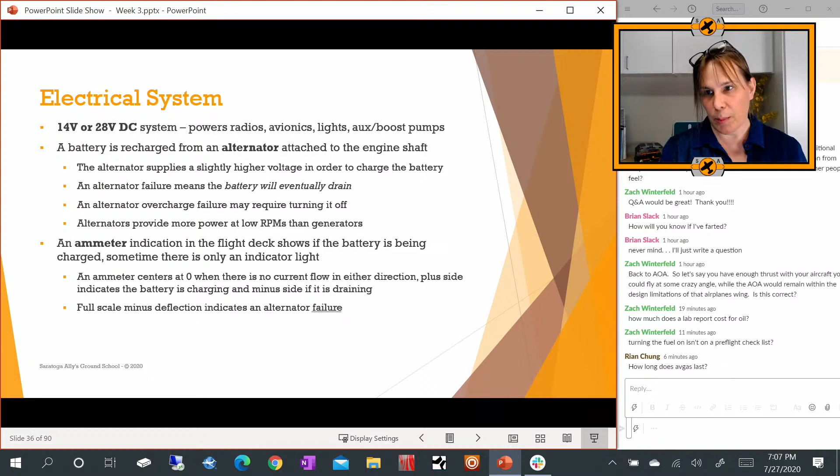The ammeter will center at 0 when there's no current flowing in either direction. The plus side indicates that the battery is charging - that's what you want, a little bit on the plus side. A minus charge means it's draining. A full scale deflection minus means the alternator is not doing anything, you're completely running off of the battery. So here's what an ammeter looks like.

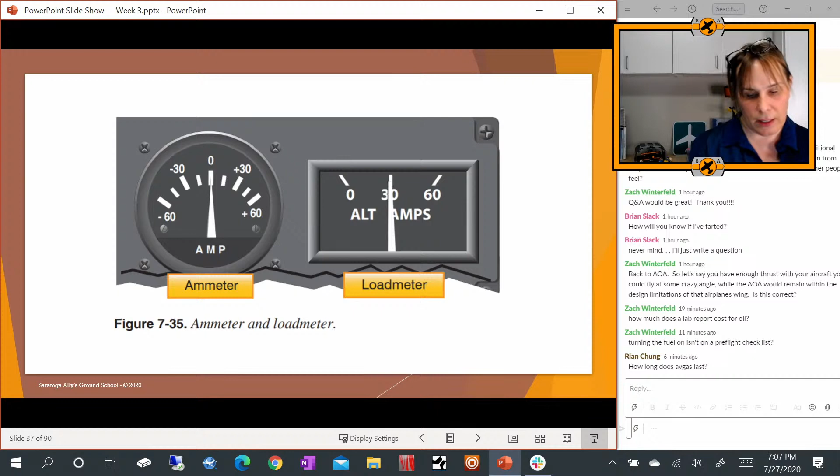There's also a load meter. A load meter is useful if you've had a failure of your alternator and you're relying only on your battery, and you need to reduce the load, because reducing the load on the battery gives you longer life out of it. In some cases, only critical things stay on: comms, the pump for your landing gear if you have retractable landing gear. You can basically evaluate what you need and what you don't need based on the flight situation and eliminate load to extend the life of the battery.

Newer aircraft will have circuit breakers, the pull type. This is one way you can reduce the load—you can pull out certain things that you're not using at that time.

Avionics are usually on a separate bus. So if you want to drop the avionics altogether because you're in that situation and only use the battery for putting the gear down or other things important to finishing that flight in an emergency, you can do that. Also, avionics usually draw a lot of power, so during startup you're not going to want to have it on—you want to give all that power to the starter to turn the engine.

The electrical system operates a retractable gear through hydraulic pumps, but you can extend the gear. They'll free fall if you do lose power, so there's an emergency override. What you can do is basically decouple the pump from the hydraulic system—you pull the breaker, and then there's a lever you pull, which allows the gear to free fall. Sometimes you've got to shake the plane a little bit to get them to lock, because there's sort of a locking joint on the gear. You definitely want to know they're locked before you try to land in that situation. If you do have electrical power, the gear down lights will indicate, so at least you have a good sense that things are locked in.

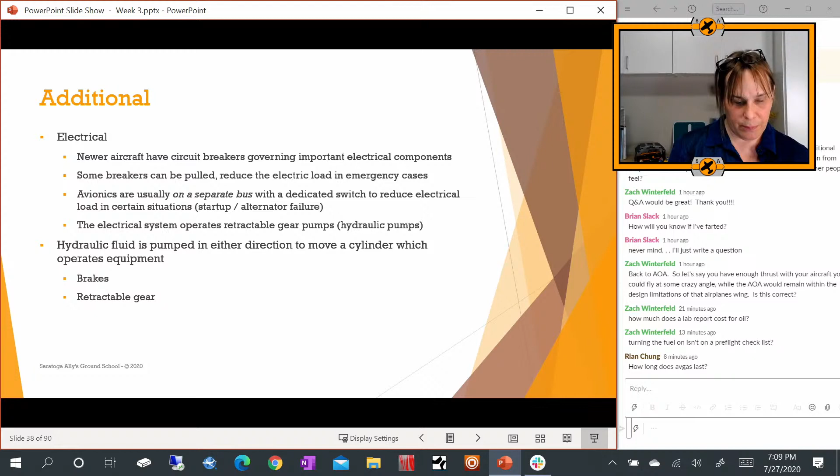Hydraulic fluid operates brakes and the retractable gear. For the most part, that's it for hydraulic fluid.

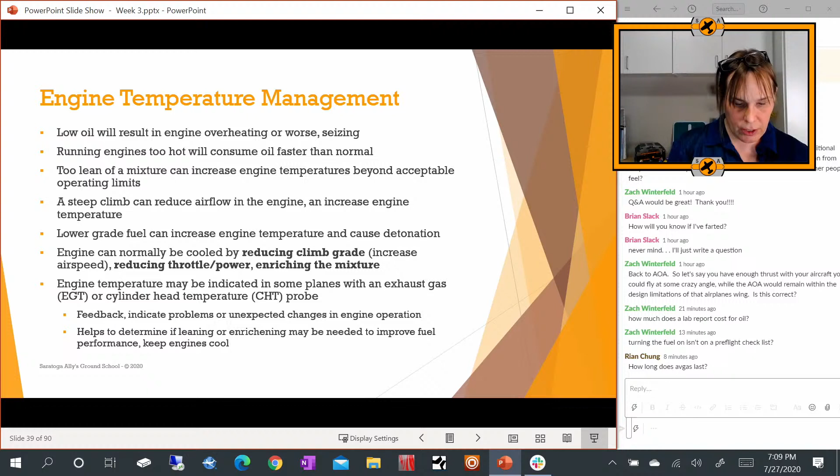So another section in the written test is about engine temperature management. This is what to do if your engine is overheating.

Low oil can result in engine overheating or seizing. Looking at the oil temperature and pressure gauge is a good indication or heads up that this may happen. Another way to know this is there are cylinder head temperature probes on the cylinders, and also an exhaust gas temperature gauge, either one. You can look at those to get a sense of how hot the engine's running.

Question: is there a standard for how long the battery should last in an emergency situation? No, there is no standard. It's really going to depend on how much of a load you're drawing off of the battery. Your best bet is just to know there are some more advanced airplanes, but you don't have to get on the ground if you lose power. People flew planes before batteries existed, the Wright brothers flew a plane without any batteries in it. That's what the magnetos are for. There really isn't any sort of rule that says you have to have so much time.

We're having some avionics installed right now in our plane that have a 30-minute backup battery, which, given that we're taking the vacuum system out, we'll talk about that later, you want to have something like that, because the vacuum system runs off the engine and will power a lot of instruments even without electrical power. Not in this section, but we'll talk about that in the next section.

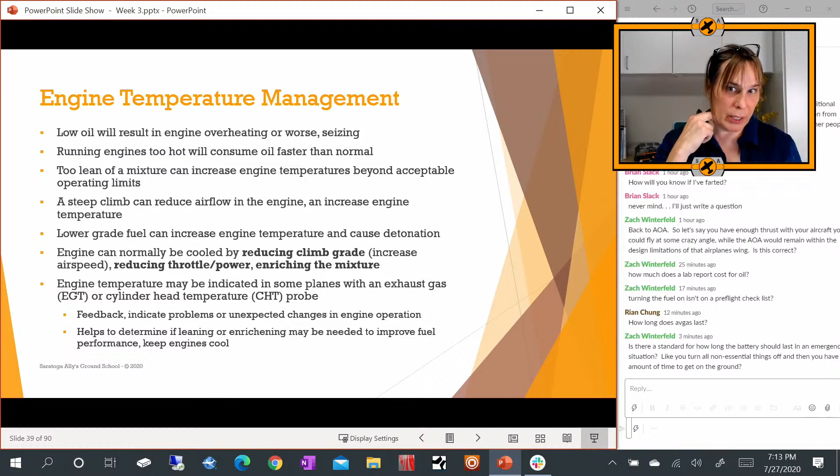These gauges basically give you feedback, indicating if there's any problems or unexpected changes in engine operation. In our plane, we really have to keep an eye on cylinder head temperatures, or I just burn a ton of fuel. But I'd rather not burn a ton of fuel, I'd rather just watch the engine gauges and burn a reasonable amount. It can help determine if leaning or enriching may be needed to improve fuel performance and keep the engine cool.

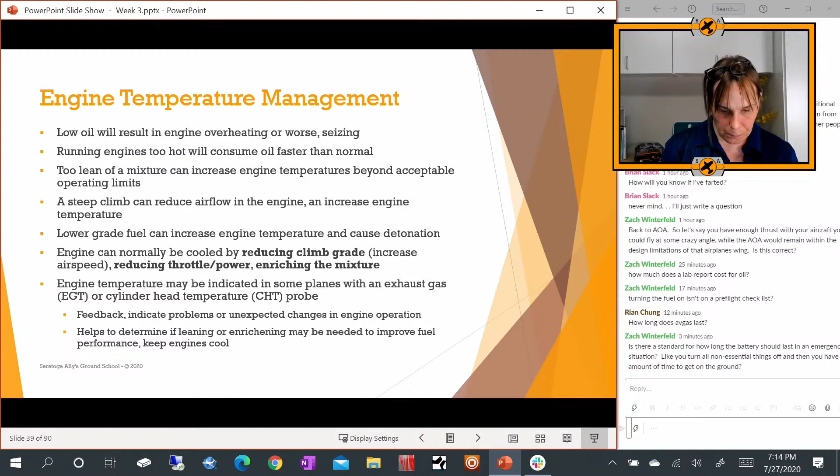Turbocharging: our plane has a turbocharger. It takes the exhaust gas and compresses the air, so it increases the air density going into the engine, which allows us to go to higher altitudes. So our engine doesn't suffocate at 10,000 feet, we can take it up to 20,000 feet.

Turbines, fascinating topic, they're just really cool, but a very long topic. The basic idea of a four-stroke engine still exists here: there's an intake, compression, combustion, and an exhaust phase on these engines. It's just the way that they do it and how compressed they can get that air that really allows them to generate a lot of thrust.

There's two types of turboprops I saw in the book, and the main difference is one of them intakes air from the back, so it faces the other way, and one of them intakes air from the front. But you'll usually be able to tell a turboprop because it has these big pipes coming out of the front of the exhaust, so the ones that are reverse mounted have those pipes really far forward. It's pretty obvious - Brian would know because he's all about turboprops and jets. A turboprop runs a propeller blade just like a reciprocating engine, whereas a turbojet runs the exhaust gas and uses thrust to pull the plane forward that way.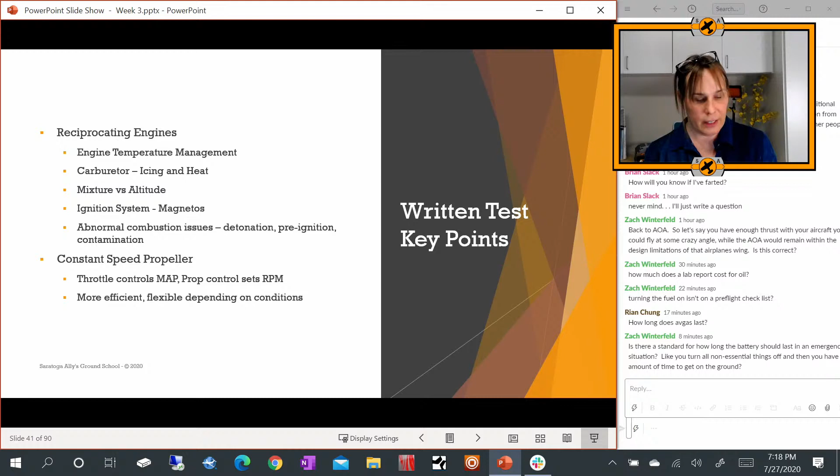So quickly, so we can go to break: reciprocating engines, engine temperature management, carburetor heat, carb icing, mixture and why mixture is important, adjusting it for altitude, knowing what the magnetos are for in the ignition system, understanding detonation, pre-ignition, contamination. They will have questions on constant speed propellers - they never used to when I took it, but now there's more training planes that have them. Throttle controls manifold pressure, prop sets the RPM - it's more efficient and more flexible depending on flight conditions. That's why they have them.